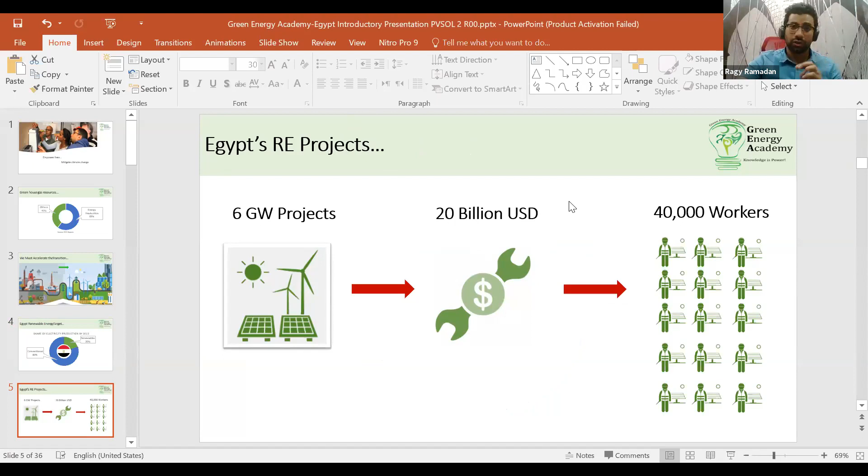For example, if you talk about Egypt, which is one of hundreds of countries trying to diversify resources towards renewable energy, you'll find that we have a plan that by 2022, 20% of electricity production should come from renewables. This will lead to installing more than 6 gigawatts of projects from solar and wind energy, with total investment estimated to be more than $20 billion. These investments and projects will require thousands and thousands of qualified workers and engineers in the field of renewable energy, either solar or wind.

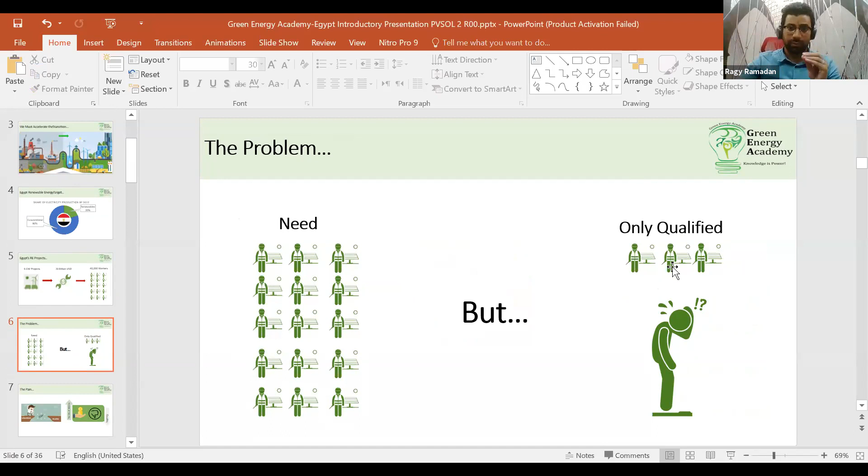This leads to the problem for which the Green Energy Academy was founded since 2011: there is a big need for qualified workers, engineers, and other employees, but qualified personnel in specific countries are very few. This problem actually came from the fact that there is a big gap between what we learn in our schools and other educational institutions, such as universities or engineering colleges, and what the market actually needs.

Here I am talking about the job markets. You may face situations where you need to start your own business, or maybe join a company or secure a vacancy. This vacancy will require a lot of technical and other soft skills that you didn't learn in your university or school. Another problem is that it happened with many of us, that we paid a lot of money to other renewable energy training providers and got very little quality that was not up to our expectations to gain the required skills in order to join the job market or start our own business.

And from this perception, the Green Energy Academy came. The Green Energy Academy is an Egypt-made international company that delivers world-class renewable energy services, specifically in the fields of trainings or capacity building, consultations or consulting services, and engineering.

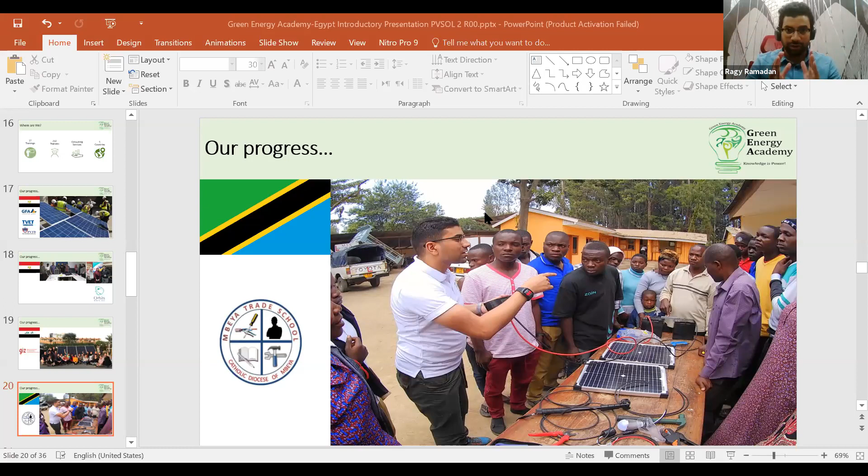In addition to the trainings, we delivered consulting services to help small companies or startups in the field of solar energy register their company, develop their business, generate leads, and assist them in early stage project management and project references, such as doing engineering and installations for some projects.

With this slide, that concludes our introduction to the Green Energy Academy.

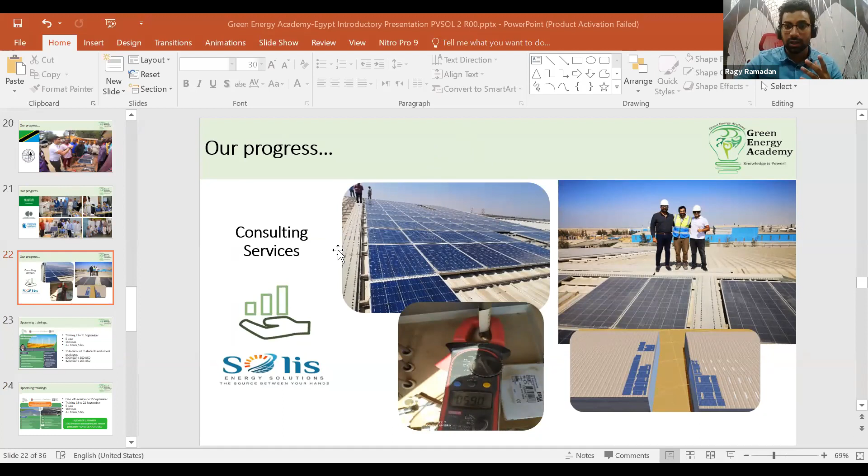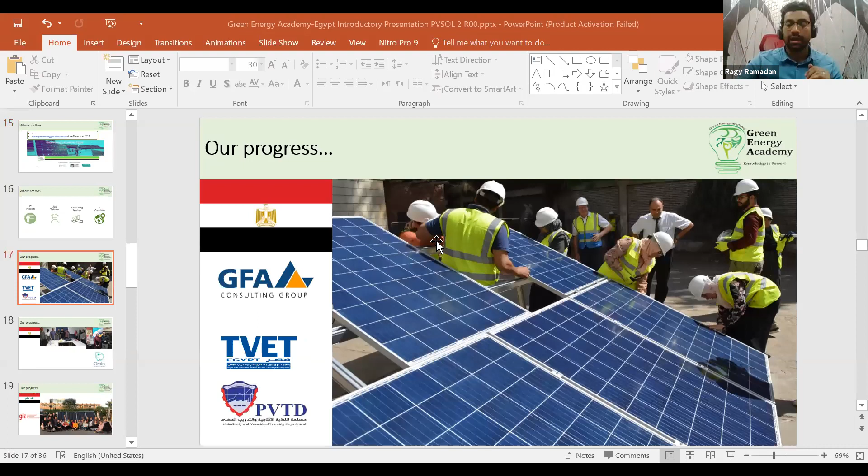Now, talking about the trainings. In the last period, we announced about 3 online trainings. One of them, which already passed, is the Wind Energy Basics, held from the 7th to the 11th of September, for 5 days.

The upcoming training will be the solar PV online training, the professional design and simulation of on-grid systems using the software PVSOL Premium 2020. This will run from the 18th to the 22nd of September, which means it is starting this Friday, and we already have many registered and confirmed attendees.

Some of them are also attending our info session here. The training will be for 5 days, a total of 18 hours, 3.5 hours per day.

Talking about the investment or fees, the standard fee is 4,000 Egyptian pounds or $250. However, if you are an engineering student or a student with a background in grid-connected solar PV systems, you are eligible for a 15% discount. This applies whether you are a student, a recent graduate of 2020, or a recent graduate of 2019.

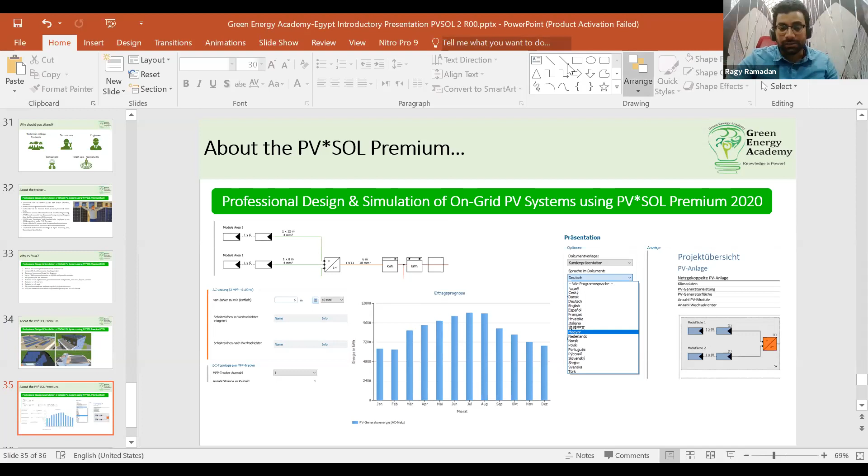As you can see here, these are some ports for the software. It can do rooftop systems of many types, and it can also do roof-parallel systems, either for residential or industrial facilities. It can generate single line diagrams, and graphs and diagrams for energy productivity, allowing you to generate a professional and complete PV design and simulation.

Now I'm sharing my screen again. I'm opening the PVSOL Premium 2020. The PVSOL Premium is developed by a company.

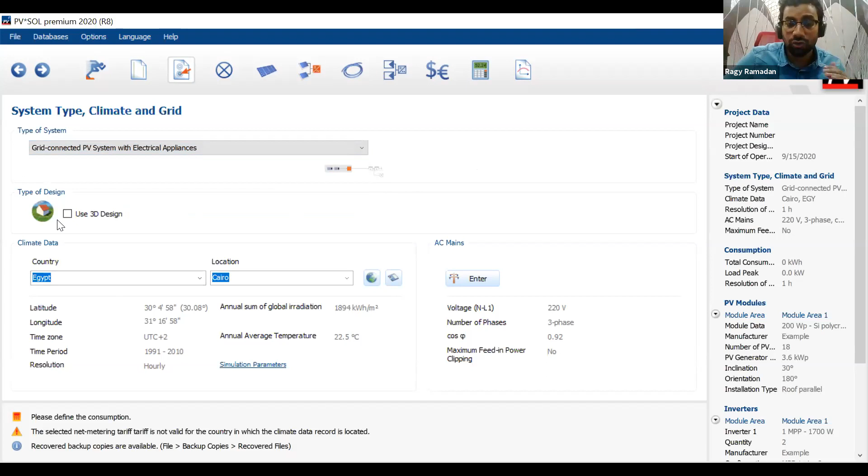Then here you can select either your system will be 2D, or you can tick this to have a 3D system. You can also select the country and location - all countries around the world are available here. And if there is a specific location you don't know, you can actually create climate data or location data easily from PVSOL and save it. Here you can also enter technical details about the AC mains, like the voltage, number of phases, and power factor.

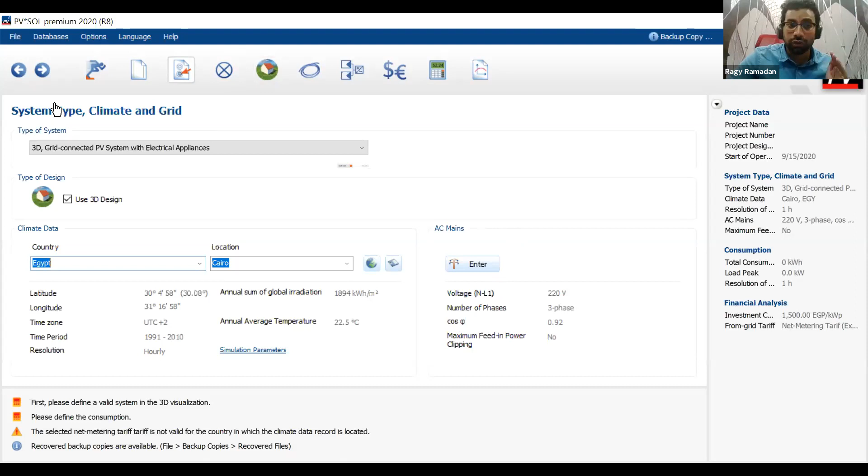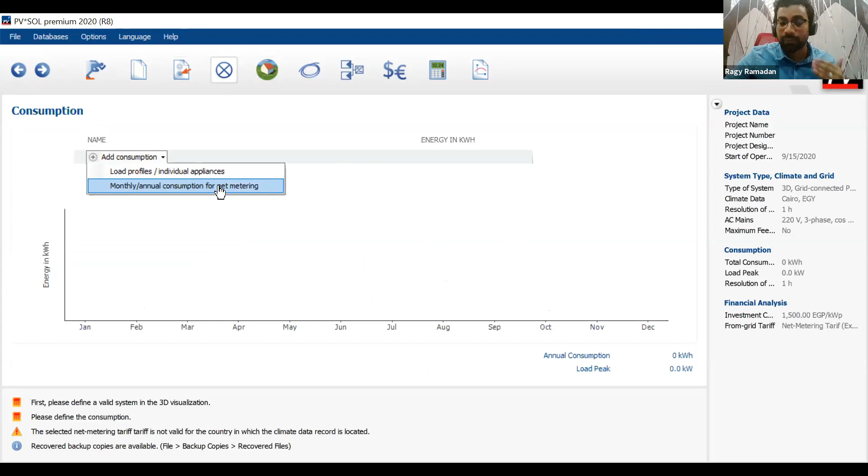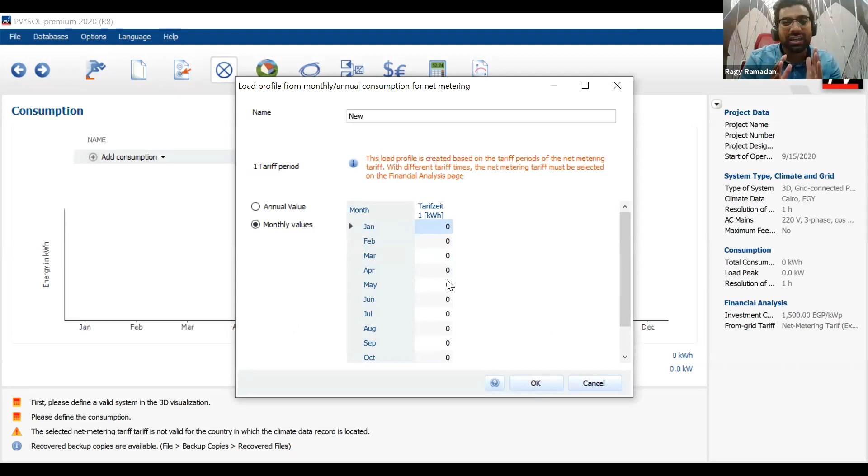You move to the next page, which is called consumption. Here you can define your consumption, either individually - like each consumer or load, how many watts, how many hours it's working - or, which is mostly what we're doing in our training, you can select monthly, annual consumption for net metering. Once you click on this, you will be able to enter consumption for your clients for each month. You do this because you need to compare your solar energy production and know how much money you will save from solar energy.

Then we can go to the 3D section. If I click on edit 3D, it will not show anything, so let's go back to the welcome screen. Let's, for example, click on any of these projects, so you can have a real project.

Now it is open, opening an old project which I need to show you. This was a project for a company or a factory called Electro Technique here in Egypt.

This project was a grid-connected PV system, and we have done the 3D visualization. After you do your 3D design, you will find a photo like this. If you click on this, you'll be able to open the window for the 3D tool. This is a project that was done by me.

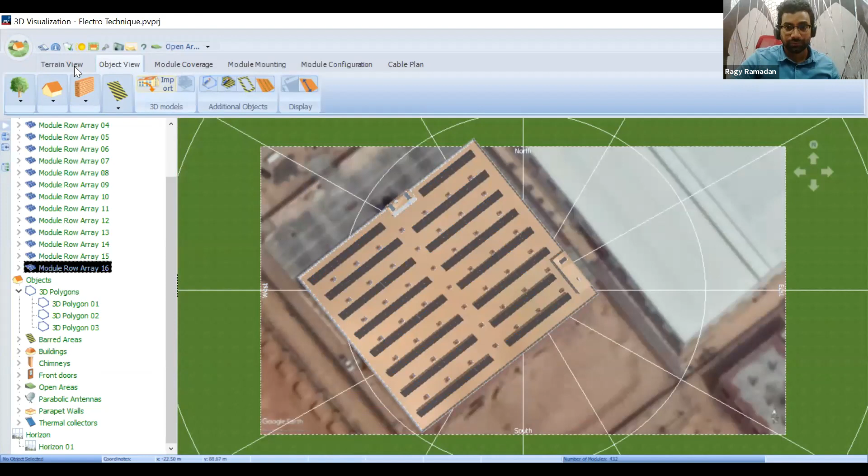Here you will be able to extrude buildings. For example, if you see the South view, you will be able to get images from Google Maps or Google Earth Pro, put this image here, and select the perimeter of the building. You will be able to extrude the building, and from extruding the building, you will be able to add solar PV modules.

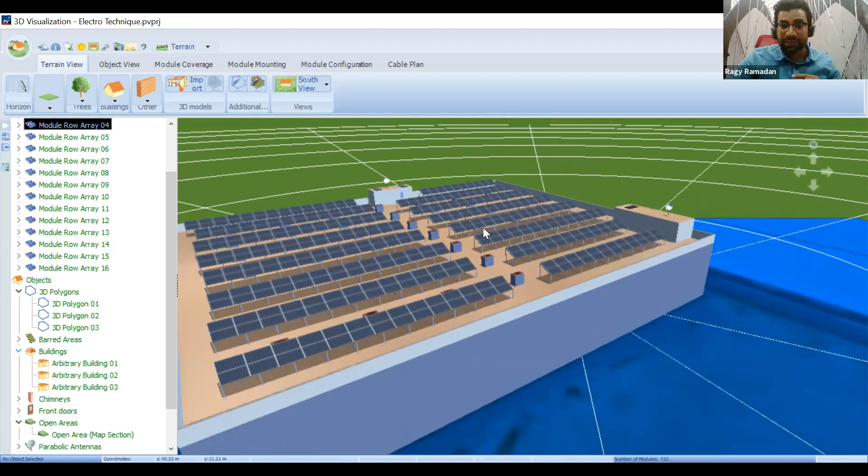Adding the solar PV modules can be done in many ways. Either you select fill area, or you drag rows of solar panels like this, or you fill the whole available area of the system.

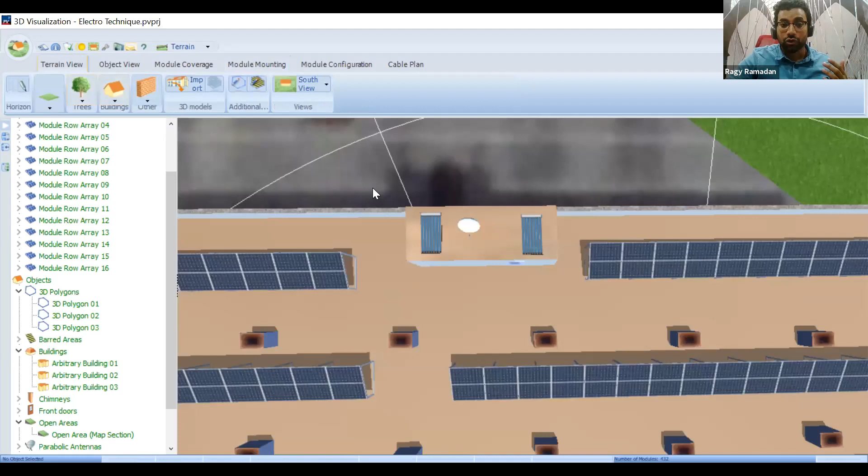Of course, in the 3D, you can define objects such as rooms, obstacles, doors, and other obstacles on the roof. You are doing this because you need to do the shading analysis of your PV modules.

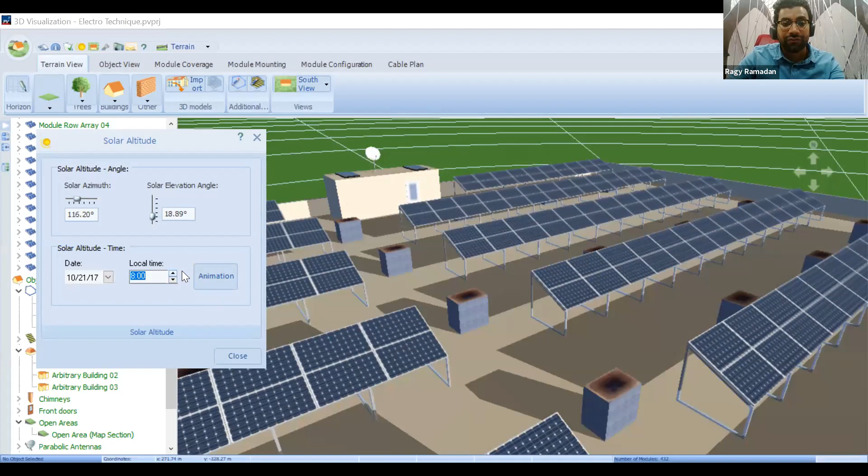Coming to shading analysis, you'll be able to see the sun and select which day in the year you need to see your modules. Going like this, you will be able to see at which times shadings occur, either self-shading from the modules or from other surrounding and nearby obstacles, how much shading, what is the severity of shading, and how long the shading is happening to each module.

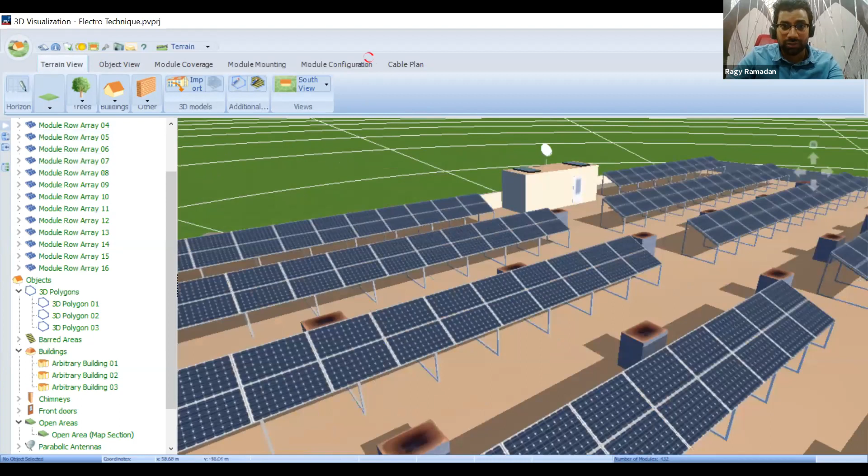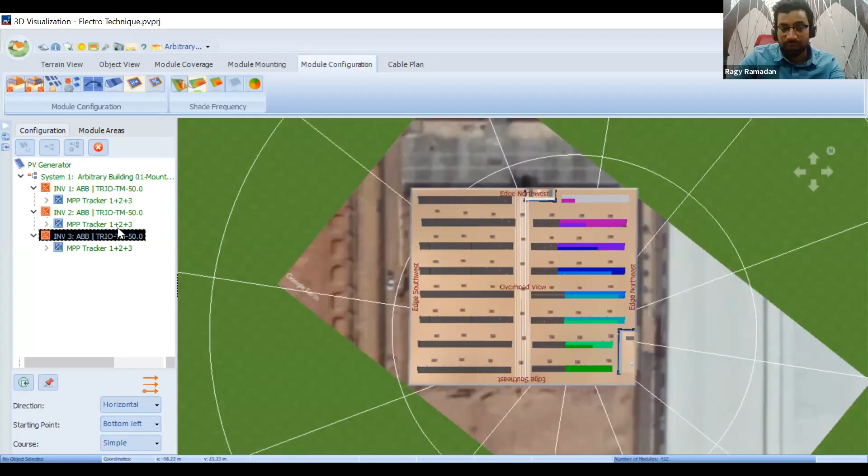After that, you'll be able to assign your modules, which means you will be able to assign inverters. For example, in this case, it's an ABB inverter assigned to your modules. This is not the end of the 3D visualization—we can spend days and days mastering it, but I'm just giving you an example.

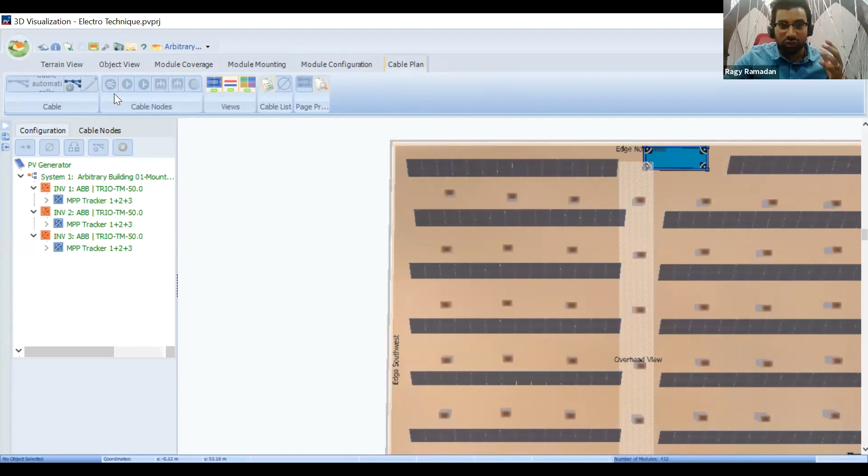One of the new features of PVSOL is that it can also do cable planning. So you can not only generate a layout like this one, but also export this layout to AutoCAD. So there is no need to design your system in SketchUp, then go and do it in AutoCAD, then go and do a financial simulation in Excel. Everything can be done using one software, which is PVSOL Premium.

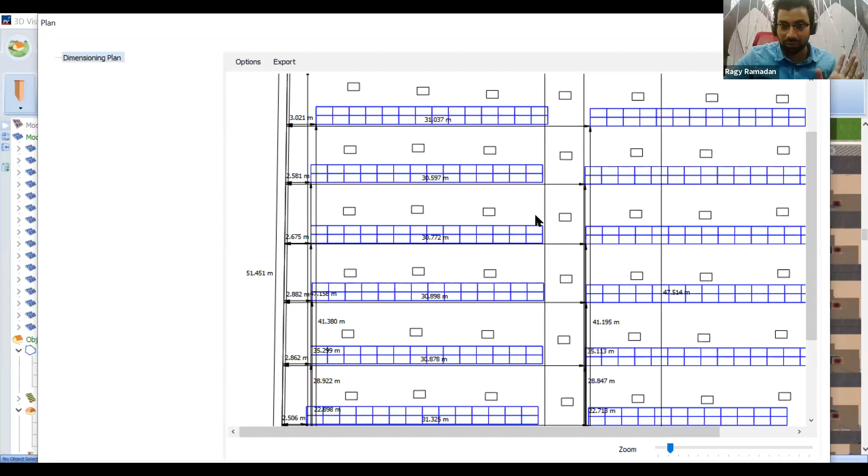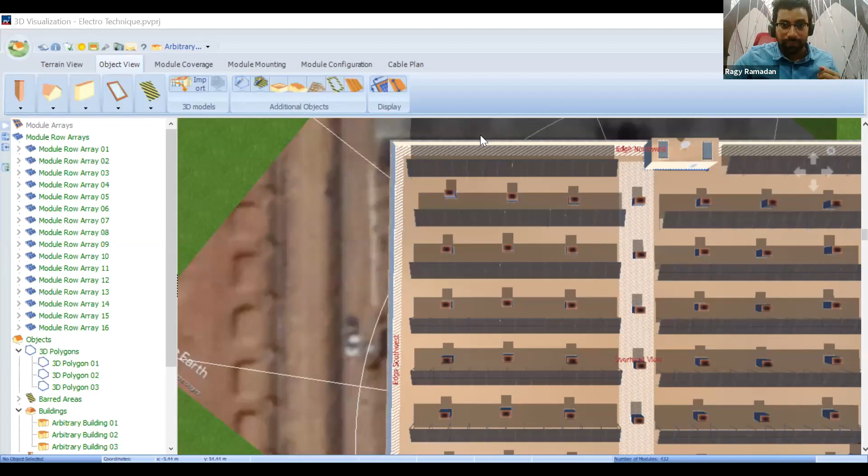After that, you can go to the next page, which is about the cable. Now, as you can see, this is a good example that PVSOL Premium does the shading simulation for each day of the year, starting from day 1 to day 365. So it is simulating—it's like making the sun go around every day all over the year in order to know how much energy each solar module or panel will produce.

At the end of the report, it will show you how much energy your PV system will produce and how much energy it will lose. Based on this, it will give you the performance ratio and specific energy yield. You will be able to know how much you will lose due to shading, if your system is undersized, or if it's oversized and you need to scale it down.

It is taking time here because there is shading in this particular example I'm working through. That's why it's taking time, because there is a lot of shading. But if there is no shading, then it will take less time.

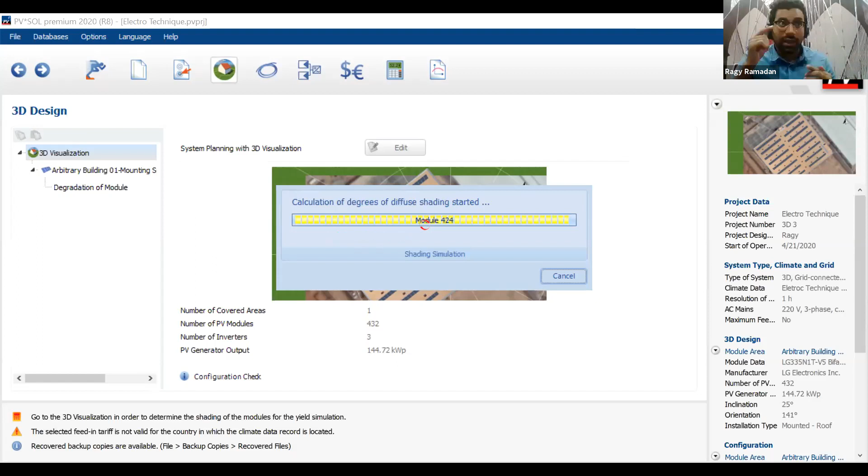Then the project owner can hire a consultant, and the consultant will say that there are a lot of losses due to shading. Please take care of this shading analysis, and PVSOL Premium is very unique in this shading analysis.

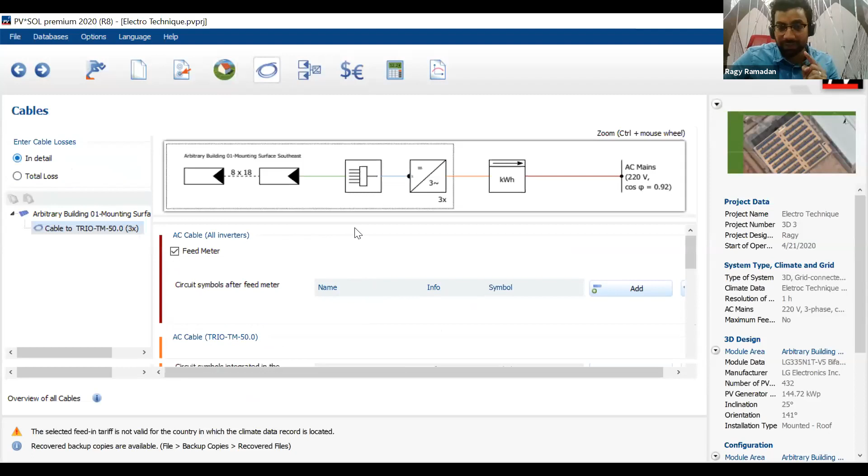Going to the next page, which is cables. Here you can see the single line diagram showing the panels and inverters. You can specify how long your cables will be, and put in the length of each cable, and automatically PV*SOL will calculate for you the suitable size of the cable for that length.

For example, if the AC cable is 100 meters long and you click here on calculation, it will tell you that you need to use a cable of 70 millimeters square in size. You can change which one, either it's copper or aluminum.

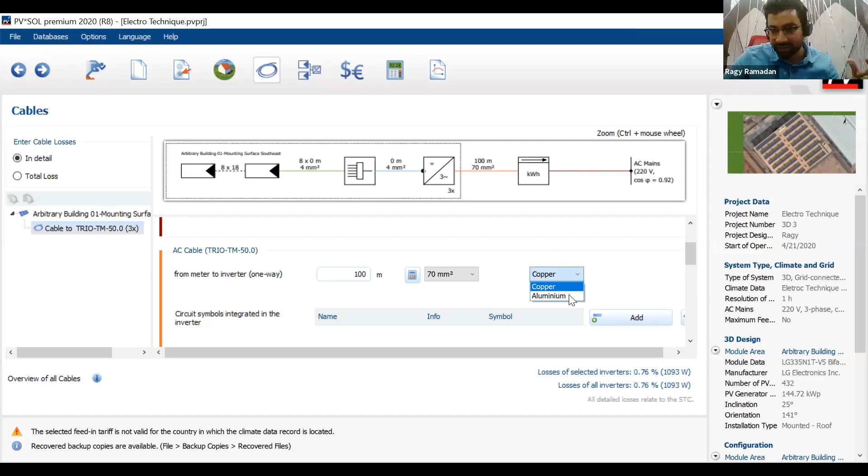Many other features under the page of cables, and this single line diagram will be shown in your final report, and it can also be exported into PDF or AutoCAD. The layout can also be exported into PDF or AutoCAD. It will save a lot of time for you because you will no longer need to go to AutoCAD and work on CAD software in order to generate layouts for the panels.

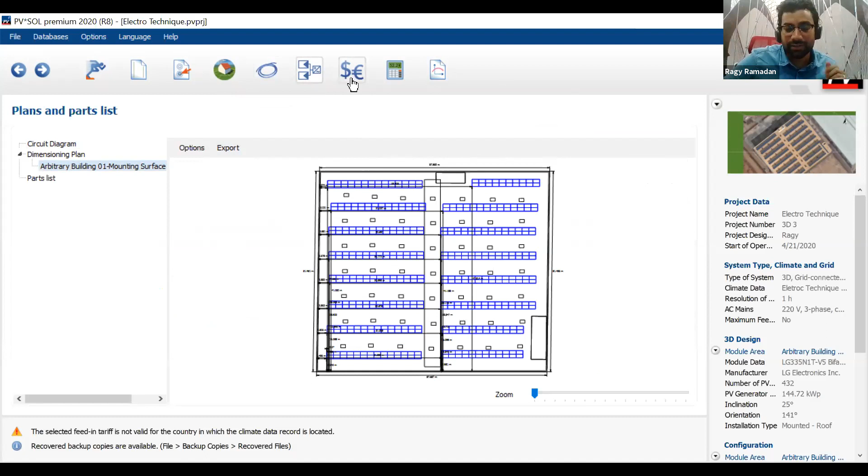The next page is about financial analysis. Here you can add the cost for your system, the cost for labor, the cost for the components, the cost for periodical maintenance, and you can also add if there will be interest or loans, and by the end you will receive a financial analysis showing your cash flow.

When are you going to have your money? What is the percentage of profit, or we call it the return on investment, ROI? And even here in the applied feed-in tariffs, you can create schemes.

For example, in Egypt we have something called net metering, which means that if you install a solar PV array on your roof, you can reduce your consumption from the grid. At the same time, if you have extra power, you can inject this extra power to the grid. At the end of the year, if there is a lot of power injected into the grid, you can redeem these kilowatt hours in the form of money.

How much money? This could be entered here, and the financial simulation will do the whole economic evaluation for you. Then if you click on results, it will do the simulation for you.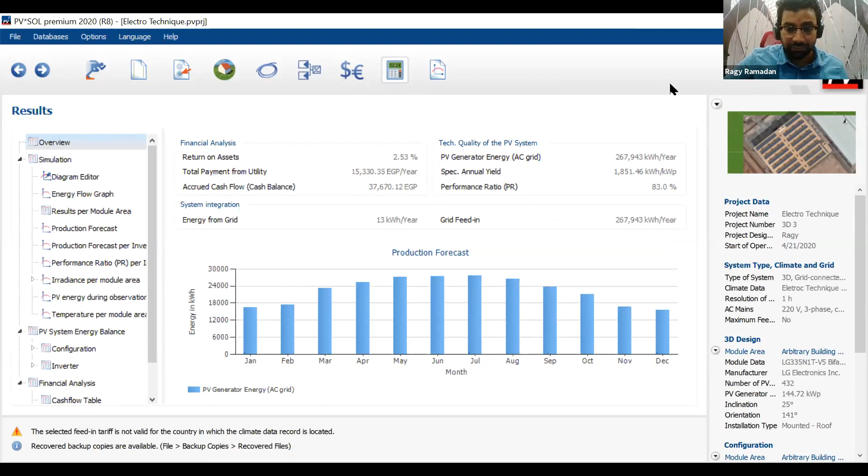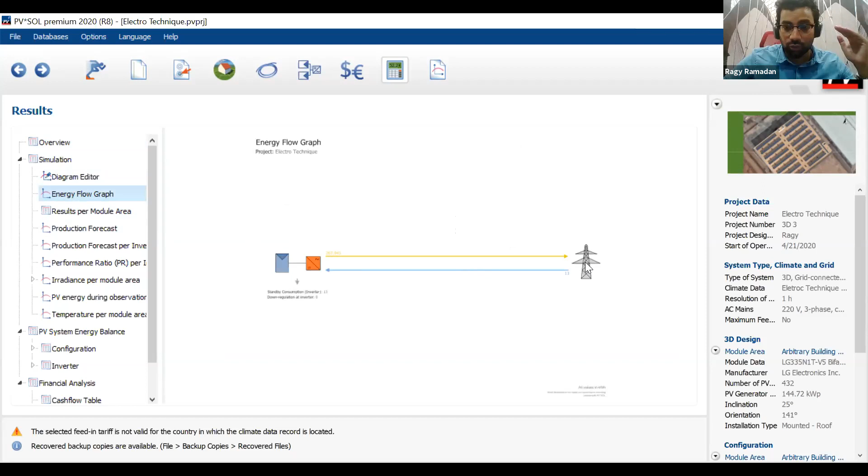To the left here, you can select which results you need to see: the simulation, how much energy you will get per year, and also how much energy you will inject into the grid. You can see the production forecast and many other results, and also the financial analysis, like how much your payback is.

Sometimes they call it the amortization period, and how much is your return on assets, how much is your profit, and so on. At the end, you click on the presentation.

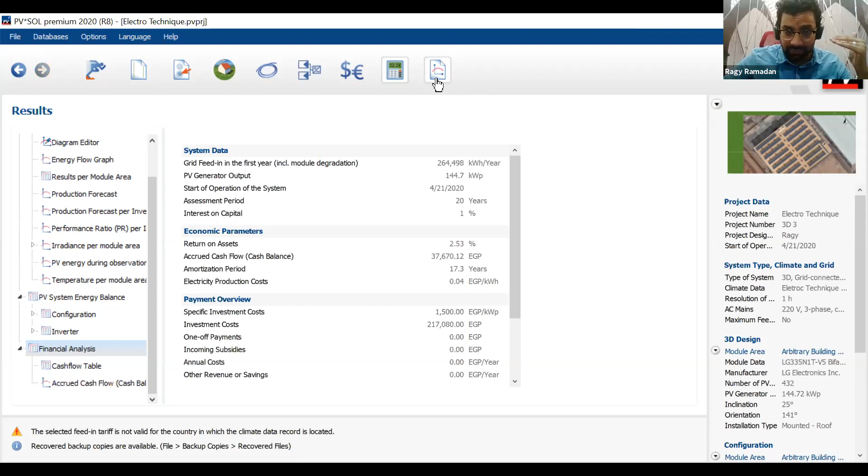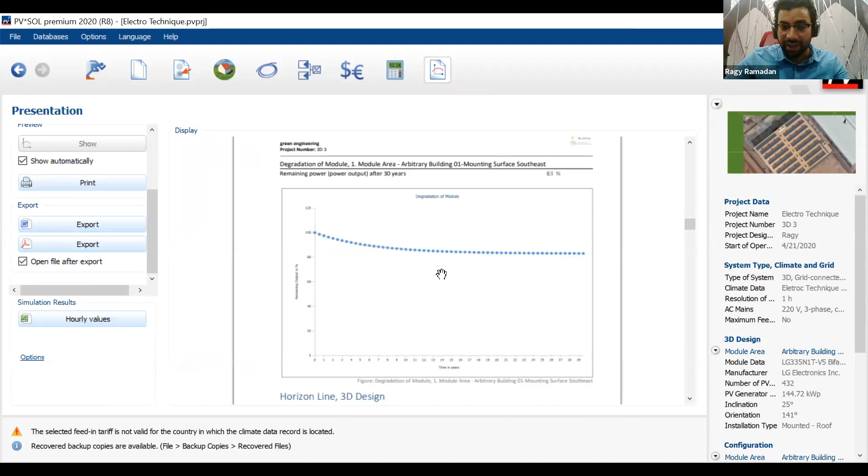You will find the complete design and simulation report. You can have it either as a PDF or Word file. Yes, you will find everything here. All of the data, you'll find it here, and you can present it to your clients.

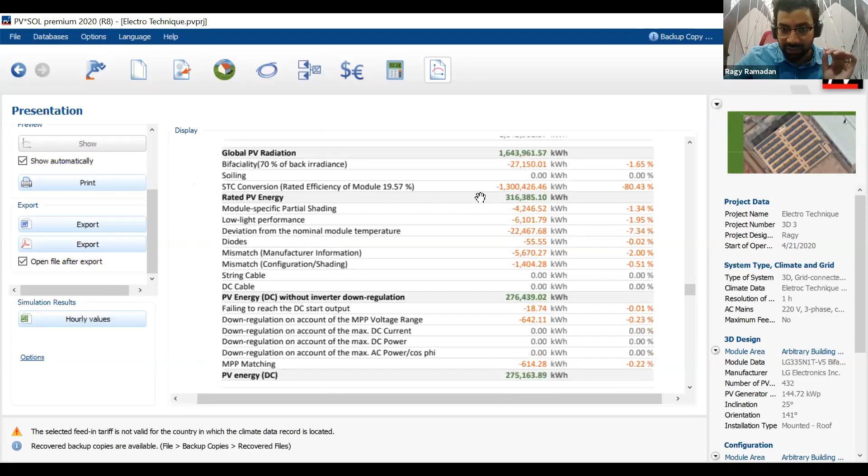Simulation results, data sheets, production forecasts, inverter data, PV system energy balance, which is extremely important. This page tells you how much energy you will lose due to partial shading, how much energy you will lose due to high temperature, and what will be the final energy from your inverter. It's very, very important.

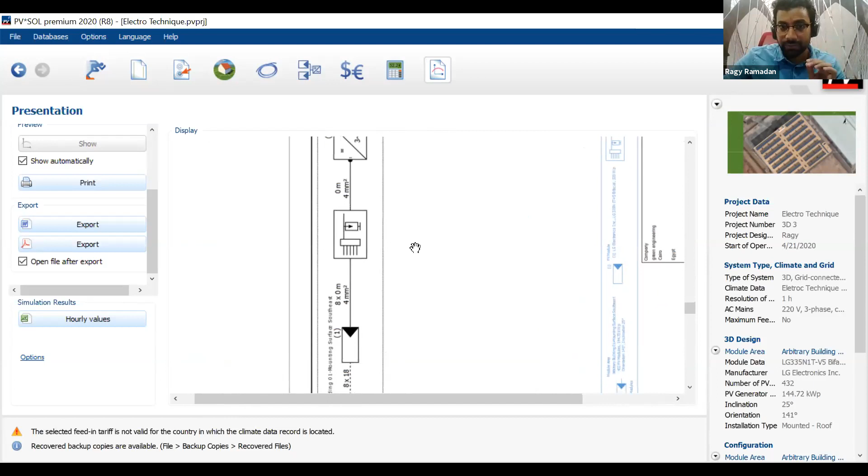You will also have the single line diagrams ready for you, including all of the devices that you added. You will also have the layouts ready for you, and you can take screenshots with the camera in the 3D visualization of your system from any position or angle that you may need.

Okay, so this was a brief about the report. By the way, a very important feature about PVSOL is that it can generate reports in 20 different languages, including Arabic. So if you are submitting this to an Arabic authority, like in Saudi Arabia, that needs documents only in Arabic, you can do this easily by just clicking that you need the program to generate the documents in Arabic.

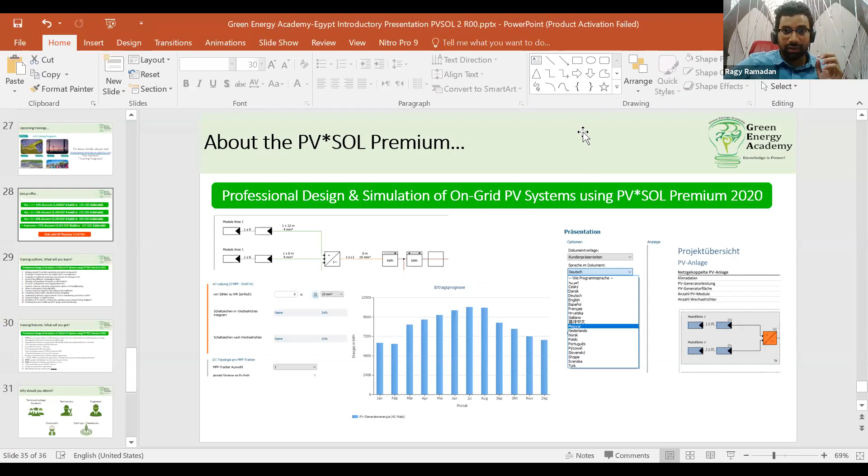Okay, I will share my screen again to remind you of the offers, with the payment and the offer that we have now. This offer is for the group offer. You will receive up to 10, 15, 20, or 25% discount if you and your colleagues or friends register with you.

Samuel is asking, may you share with us how much it costs to acquire an annual PVSOL license in USD? Nice, this is a nice question. Thank you so much, Samuel.

I'm sharing my screen again with you to show the PVSOL homepage. The PVSOL Premium, which is the full version including 2D and 3D visualization and design, costs 1,195 euros. You can deduct your 2.5% voucher discount that I will provide to you.

If you don't need the 3D, you may only need the 2D, for example to work on an off-grid system. You can go to other products, like PVSOL 2D only, which has the full features of PVSOL Premium except 3D. If you go down here, you can see the product highlights, and the cost is 895 euros, which is 300 euros less than PVSOL Premium. You are also still eligible for a 2.5% voucher discount.